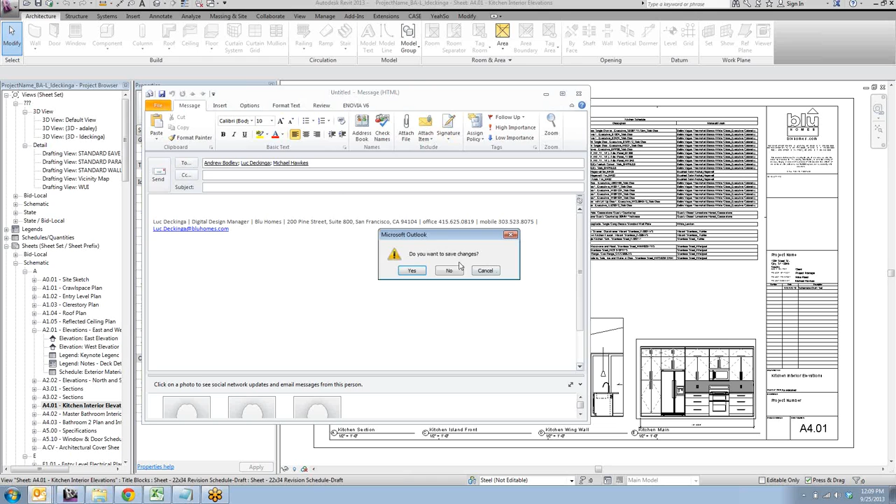else in our inbox. Like, I have my inbox set up so that anything that gets sent to Revit managers specifically will go into its own folder, because I found that if I'm really busy and I get an email, I'll read it and then forget about it or forget to tag it or something. So if you guys could start using that as a way to track issues and make Revit requests, that would be super helpful. All right.

All right. I have some seed model things that I want to go over. That's sort of the thing that we have more to look at than we will have time for. So I'll do that at the end of the meeting, and we'll get as far as we can with that.

The other things that I wanted to mention, we had talked about call-out codes, and we have a system for those which interfaces with the spec library, and I have a sample output from that. And I wanted to get feedback from all of you guys as to whether what we have is going to work for you, whether we need to change it, or exactly what we want to do with it. So I'll show that stuff here in a few minutes.

There's also been a change to the window families, and there have been some updates in the type catalog that I'm sure you've all seen the emails about. The only major thing that has changed with those, and I don't feel like it's necessary to bring up the families and show you, but the buck object, which used to be in there, has been removed because the factory doesn't need it, nobody's using it, and it sort of made our families more complicated.

So that's been removed, as well as some of the hosting relationships have been changed because they used to be based off of that buck. So that stuff you don't really need to worry about. Let me know if something breaks in the windows, though, or if they look like they're hosting weird. So yeah, just know that I've been in there modifying things.

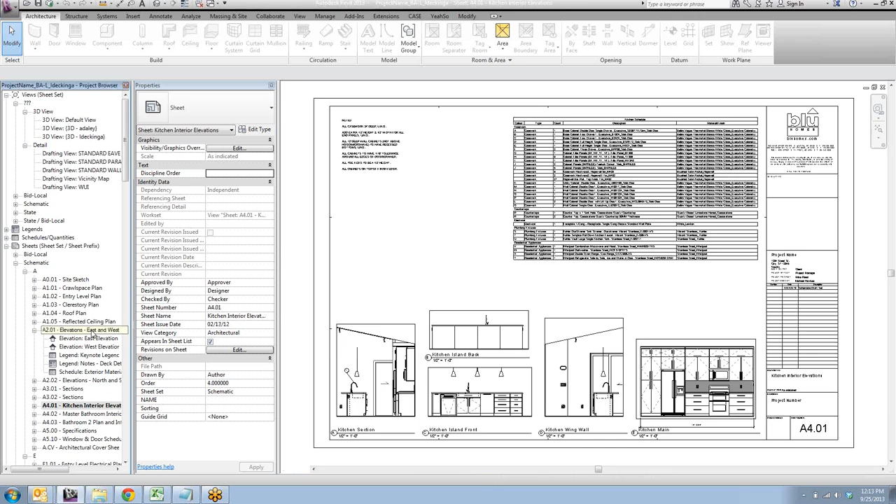Yeah, so I guess just to break it up, we have PSA details that you draw for your projects, and then there's the standard PSA details that we're developing. And those are coming from Nocti. So she has a PSA book that has renderings of the options that she wants. And then we look at all the PSA details that we've done, and then develop details based on the renderings that Nocti is putting together.

So the PSA details that you're developing for your projects aren't necessarily going to become standard details, so I don't want to tell you to stop drawing PSA details. But at this point, you probably should stop bringing all of your details into the in-process library file. Other than that, if you have PSA details that you think are standardized or should become a standard model, just give me a heads up that you have it, send it my way, and then I can either forward it to Nocti or the powers that be so that they can include it into the PSA book.

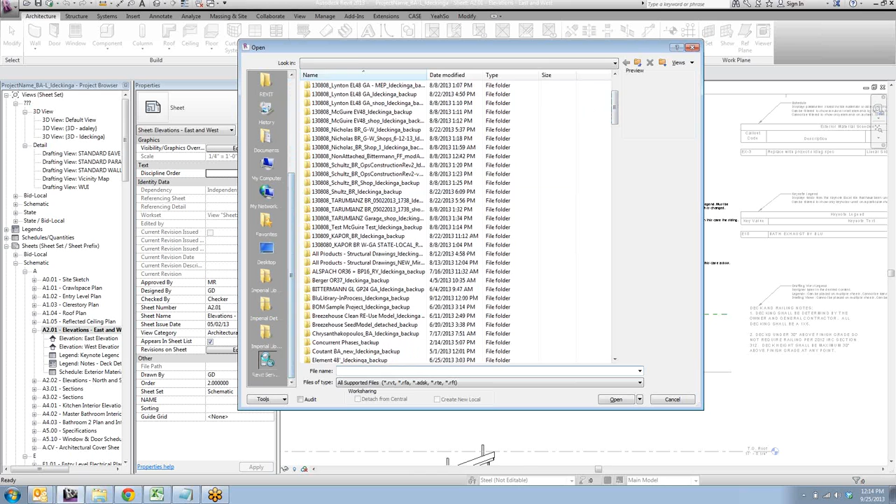Where's that file? Or the file that you're working in, all of the standard ones? That's in process. So BluLibrary. Oh, it's on the S drive. No. No, we put it up here, didn't we? Yeah. Oh, BluLibrary, that's right.

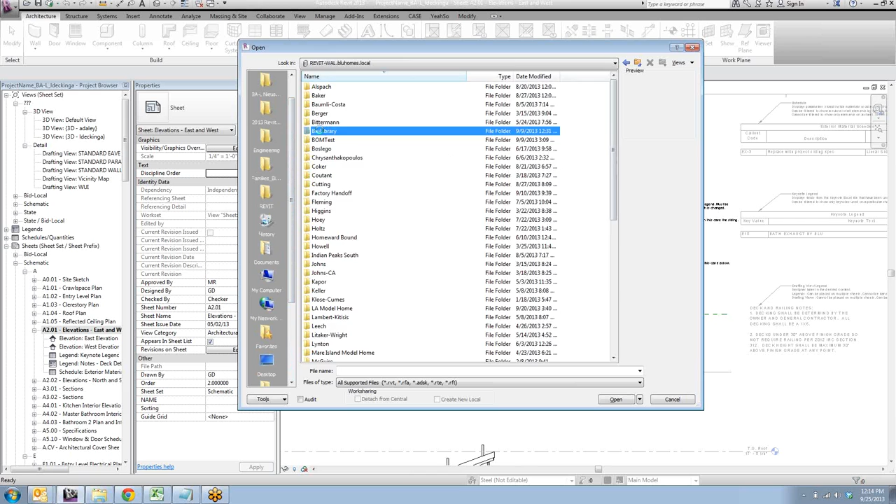Okay. Yeah, so Chris is working in this file trying to standardize PSA details, and I know in the past when people have had free time, we've been trying to compile all of our project details that we've drawn on a project-by-project basis into this file in order to look through what we have and pick out the most standard ones and work from those. And I think what Chris is saying is that we don't need to collect any more project-specific details in this file, that we have enough to work with.

So if you have something that you think should be placed into this file that we haven't used before, just talk to Chris, contact him. He's organizing all of this. And make sure that you're not just throwing a bunch of stuff into this file, because it's getting to the point where it's more complete and more organized, and if we have a bunch of hands in there moving things around, it gets hard to tell what's new, what's been looked at, what's been edited. So Chris is organizing that. If you have time and are working on these sorts of things or drawing PSA details, just check in with him before you start moving things in.

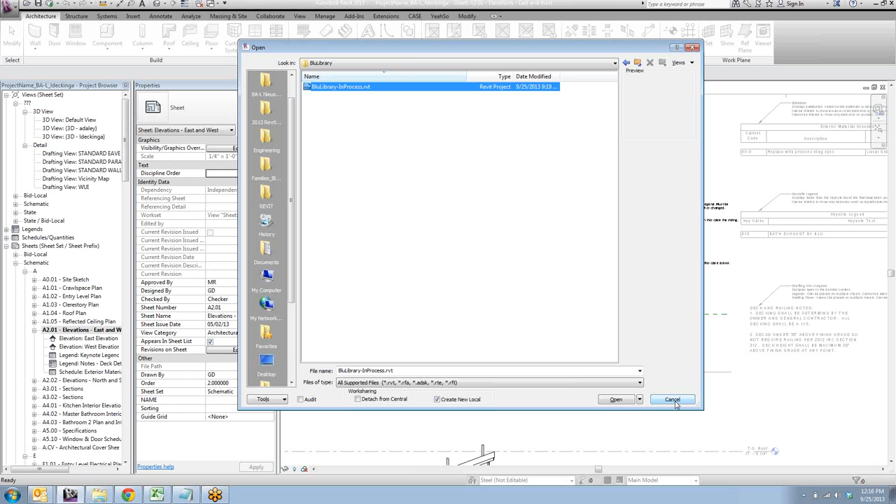Yeah, and if there's a detail that you think is a standard that exists, just let me know, because, for instance, this morning Andrew emailed me about a deck edge detail, which those are already in process. So there's the potential that it could already be in the file and already vetted. So just give me a heads up.

Okay, I think those are all the general announcements. I want to talk about call-out codes with you guys and show you the work that has been done on those. And just as a reminder or a little bit of background, this effort of creating call-out codes for all of our different objects has two purposes. One, so that there's less work for designers to do on a per project basis, because all of these call-out codes would be defined in the family, or in the type rather.

So when you go to tag something in a view, it already has a call-out code associated with it, similar to the way that the doors and windows do, rather than the current process, as I understand it, of going into all of our interior elevations and modifying the instance ID parameter and numbering things 1, 2, 3, 4, 5, 6, 7, all the way through however many you had, as a way to tag them and associate them with a particular interior elevation schedule. So less time on the designer end and more consistency between projects is what prompted all of this.

And after a couple of rounds with a handful of people trying to figure out exactly how we should be naming things and organizing them and grouping them, we came up with a system that we organized with Laura and Josh using the part inventory.

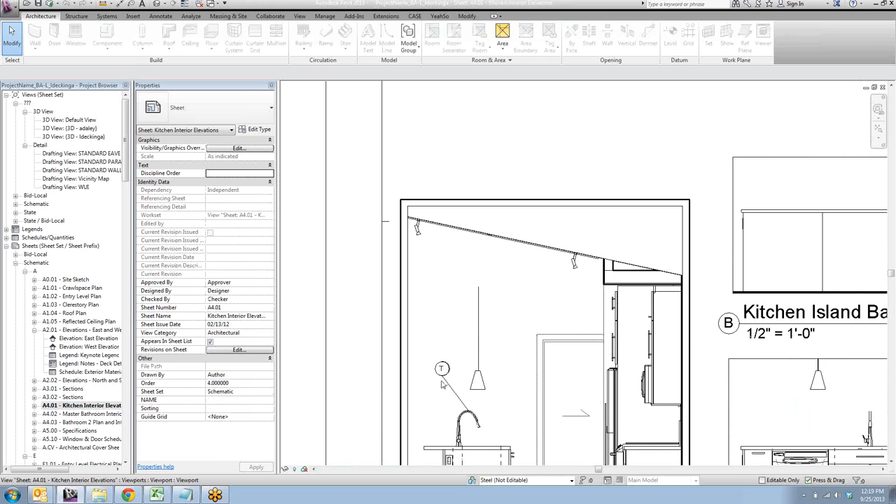So the proposal is that this call-out code would replace the code that we're using on the interior elevation, and I'm in the seed model right now, and these things aren't tagged fully, but you can see, this probably looks familiar to everybody, where you have a tag which is reading the instance ID, and then the instance ID for this particular object, you go in there and you set, and then that lets you reference the object inside of a schedule.

I'm not sure if this is crucial for us. It may help procurement if there's consistency between things. They might start to recognize what a 3472 is, but I doubt designers are really going to see that many projects to be able to associate those things, at least not for a while.

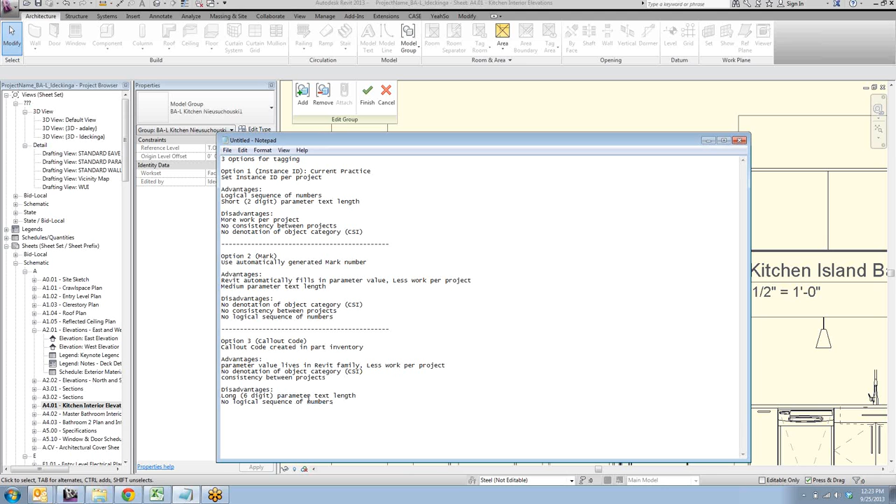yeah, and then the other thing, the last disadvantage is that there's not a logical sequence of numbers. As you can see from the spreadsheet, 9504 doesn't mean anything by itself, and you're not going to have a sequence of things in your drawing. You'll have just whichever of these you happen to have in there.

So given those as our options for how to tag things inside of our projects, do you feel that the disadvantages of not having that logical sequence and having a longer callout code are so disadvantageous that they outweigh the advantages of having the consistency and not having to do the work per project?

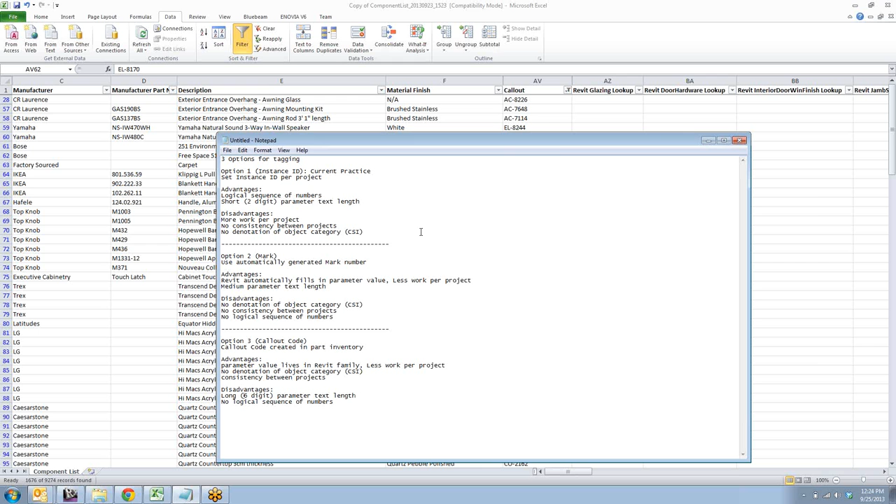Is it just going to be the text, or are we going to have an oval or a circle around it, or is it just going to be floating out there? Sorry, say that again? With the tag, is there going to be like a square around it instead of the circle, since it's long? I mean, we can make it however we want. The circle definitely doesn't make sense because it's going to be longer than it is tall, but the graphic of that, we can make it look however we want. What about a rectangle? Rounded rectangle. Octagon. Parallelogram.

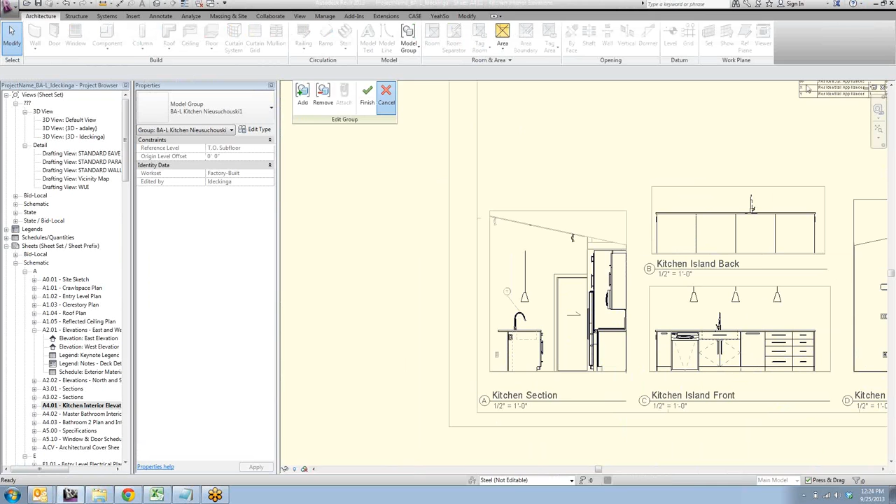Octagon. I think the general consensus here in Ann Arbor is that the call-out codes are a good idea. Yeah, that was option 3. All project. Kevin's for it. I mean, the logical... You guys are okay with having a schedule that says CO 1972, FR 1267, like that? That's not too bothersome, or if it's a little bothersome, it doesn't matter all that much. It rocks. That's what the code is.

Yep. Love it. It's still going to show up in the schedule as like a module. Yeah. It's just going to have another column that says mark or whatever, or call out. Yeah. I don't need to really pay attention to it, which I guess is a good thing. Yeah. Okay. You just tag it and model schedule. Good. Okay, yeah, I agree with you. I would rather do the work once and not have to do it on a per project basis.

I just wanted to make sure, and I'm glad you're on the line, Kevin, because you're the person who reviews these and gives the okay on how the drawings finally look. I think it's worthwhile to do it this way. I just wanted to get the final check from you guys before it's all implemented and we update all the families with this information.

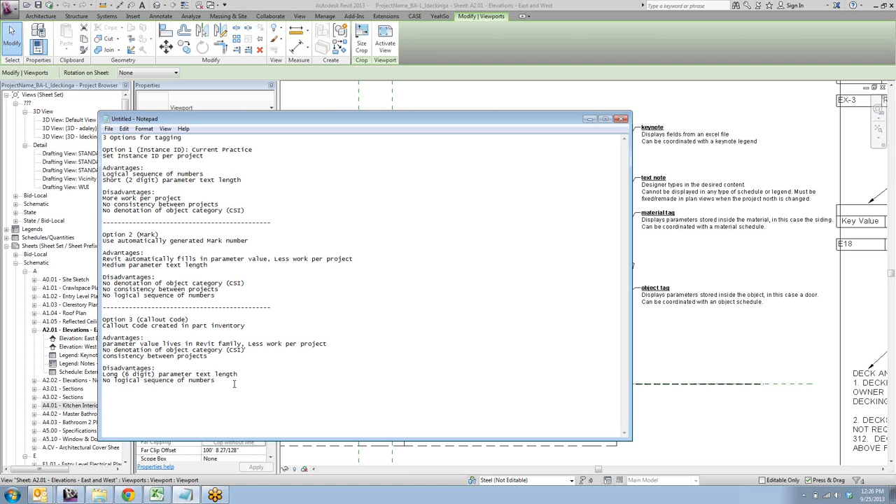Hey Luke, isn't it possible to put things in order anyway with sort of a hidden field using the mark or instance ID? I mean, you can still put things in a certain order on a schedule. Yeah, certainly. And actually, because we already have the instance ID parameter in there, we could still use that as an ordering mechanism and just not use that in the callouts. Alternately, we could add an order parameter similar to the way that the sheet sets are ordered. It's basically that same sort of idea.

But since we have instance ID and we've been using it and it's already in all of our schedules, I sort of want to just say keep using that as an ordering mechanism, but just don't use it as a call-out mechanism. Yeah. Doesn't that kind of undermine the whole point? Well, it's just like in the schedule and the drawing, it might help to have it in a logical order. But then...

Well, you're already going to have it grouped by CSI, right, inherently, and then since the first two numbers are manufacturer-based, it's going to group those. So your Toto toilet is going to be near the Toto push button and stuff. So I think it might. I'm not sure if those first two are manufacturer-based. I think the first two aren't manufacturer, so you may have to use a separate parameter to get everything grouped together. The first two... What's that? The first letters are. Oh, it's just kind of by coincidence that some of those are.

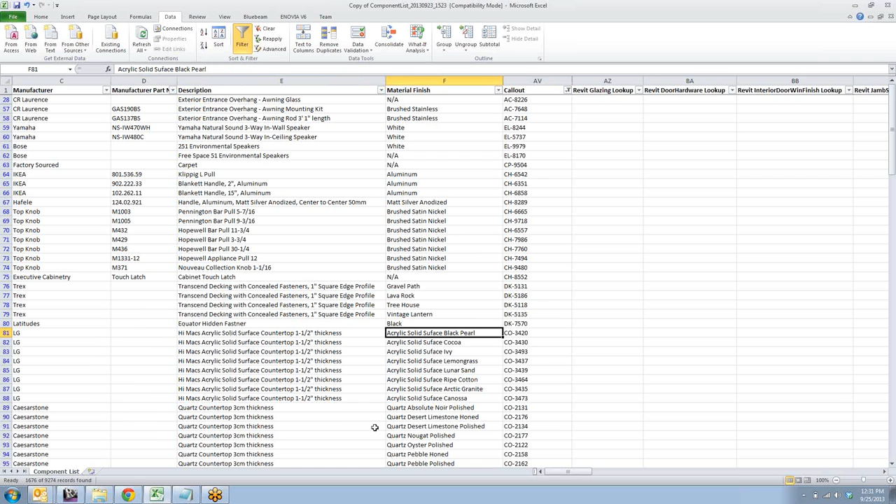Can you show me what a drawing looks like then? With this? Sure. So here's my—I didn't input these codes into this drawing, but this was my shortcut of how all of the different schedules work inside of Revit. I think the most relevant one here is this material tag.

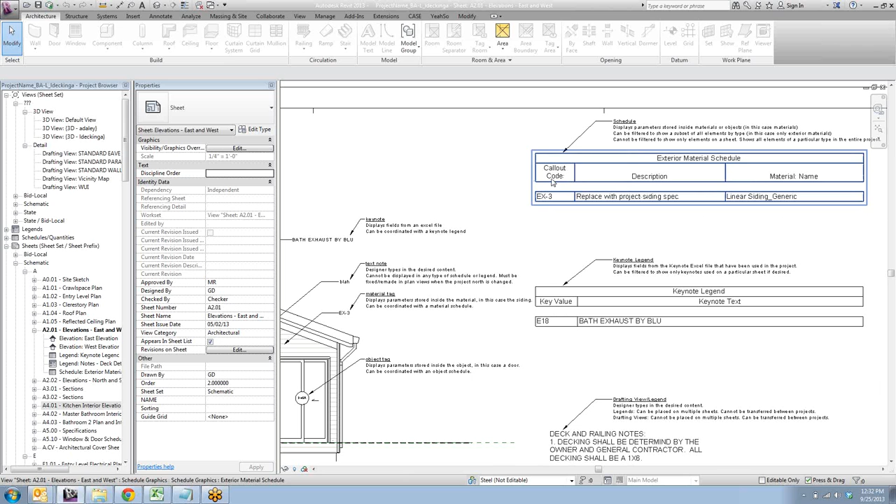So it says EX3. Here's an exterior material schedule which says EX3. This is generic because it's in the seed model, but this would say cedar siding, whatever the reveal is, and then clear cedar over here. But instead of EX3, it would say—

CA-4893 or something. Not exactly that. I didn't memorize them yet. I would be impressed.

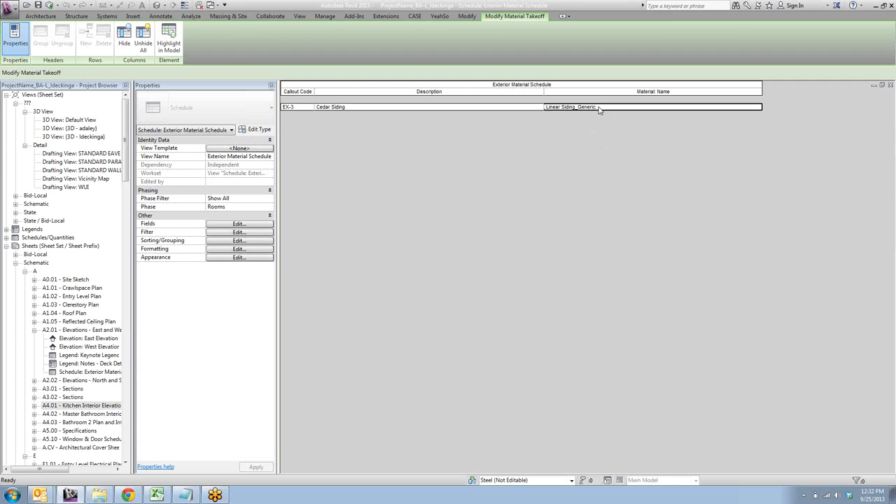And would these numbers themselves be on the order so that we can look number to number? Sorry, say that again, Kevin? The order that is rolling out, that's replacing the STRF. Is it possible that these numbers are also on the order so that we can compare number to number as we're checking our stuff?

That's a really good point. I don't know how the sales order is being generated. If they are using information from our part database as a way of filling out the order, then it will correlate, because all of these numbers are stored in the parts database. But if they aren't, then we can't. It'd be really cool if they did. It would be really cool.

So you need to get together with Kay. Okay. I will do so. She's done a number of various situations—she's told people in design what they need to do. So I would say, here's something that we're doing, and the order should probably follow suit. Like, not to be mean, but I don't think it's really a question.

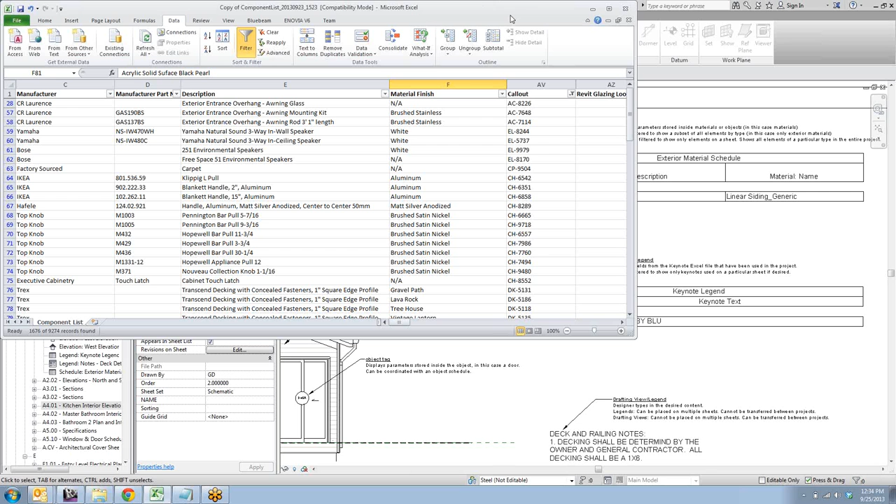So potentially we have a spec database that's tied to all of these, and all of that's consistent. So at least within design, we're talking to one another. Yeah, exactly. And actually, you can already see all of these codes - they're already integrated into the part database.

I think Jeremy made a new release of BomGen and it was pulling from the database, but he didn't want to say these call-out codes are in here until I had a chance to show you this stuff. So if you run the generate component list function in Revit right now, the list it spits out, all of these call-out codes are already in there.

And that's actually what this spreadsheet is. It's just an export of the component list from yesterday.

So what we'll have to do is take these codes and update our families so that they have all of this call-out information in them.

But once that update has been made and you load those families into your projects - I will load them in your projects - you should be able to use them. I will create tags that will read this specific parameter in all of those families.

I think it's still going to be the call-out code parameter, but we might have to make a bigger box to accommodate for the 6 digits. I will do that and send it out to you guys and let you know when everything's been incorporated back into the library. So for those of you that have flex time and want to do copy and paste into families, let me know.

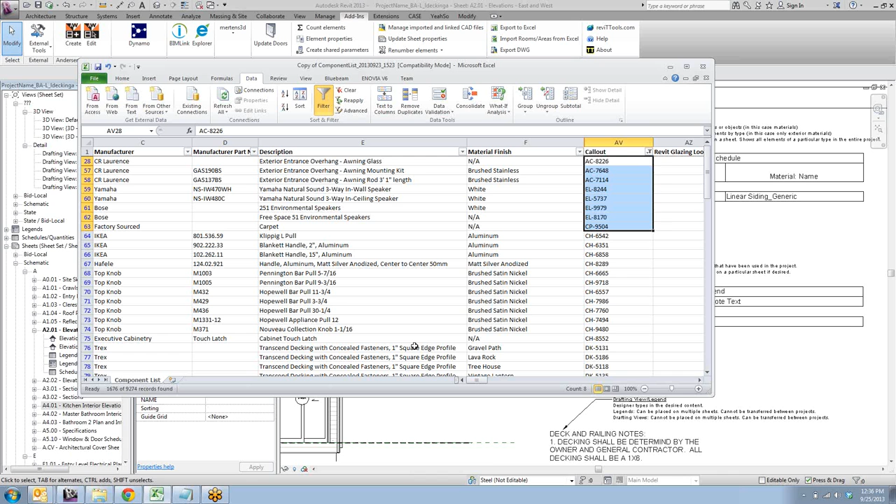I know you're excited.

Okay, that's it on call-out codes. Thanks for your feedback, I'm glad we're all on the same page, and I will follow up with

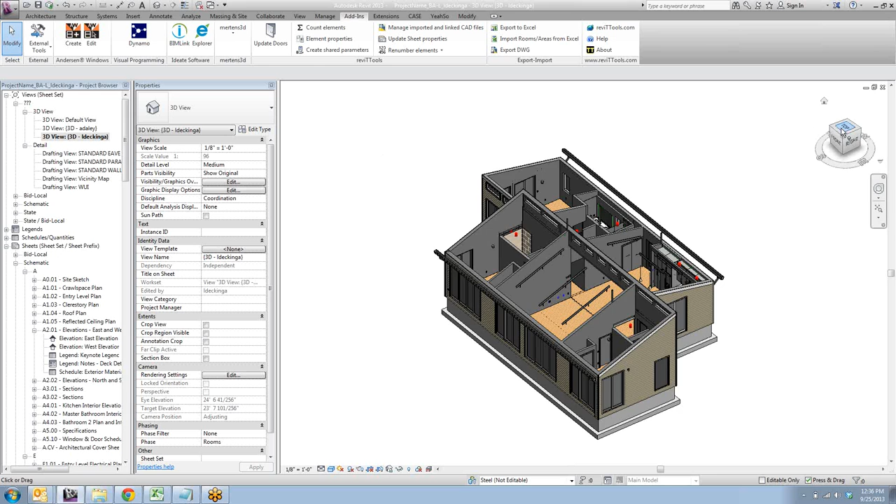Kay about the sales order and incorporating it into that. Get me involved, I know that's going to be a problem. Okay, you can be the hammer.

All right, in the rest of the time that we have, unless anybody has immediate issues that need to be addressed, I wanted to talk about some seed model process.

So in the last week, we've had a couple more people start seed models. I know Kevin started a Lofthouse seed model based off of Higgins, and Youngju started a Breeze model, and like I said before, I don't remember which model she based it off of right now.

But as we start building these, and as more people start building these, there's a couple of tricks coming out to make them easier. Kevin and I worked through a couple of things yesterday, which for anybody making seed models, and maybe even people working on current projects, are going to make things a lot easier in terms of moving things around and rotating them, and rotating project north and all of those sorts of things.

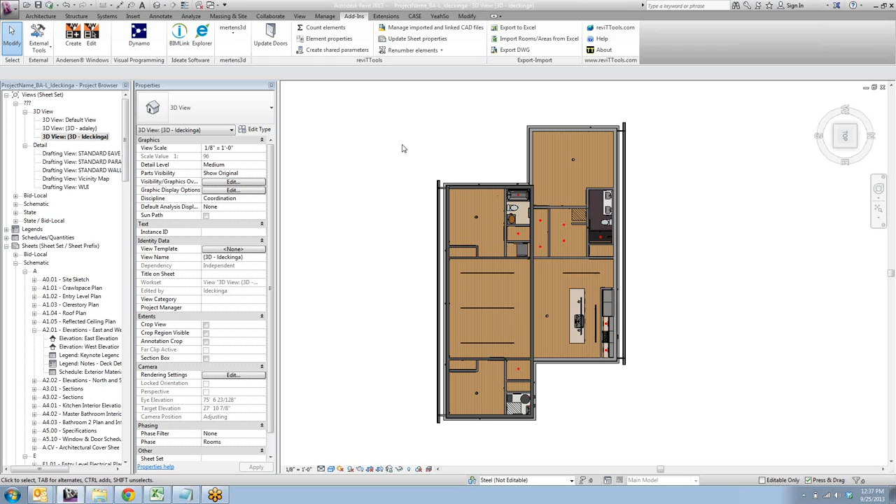The big one that Kevin and I talked about yesterday is if you start off with a project model, it's placed at a particular location in space, and getting the model back to the 0,0,0 origin point of the project can be really difficult without this really simple trick.

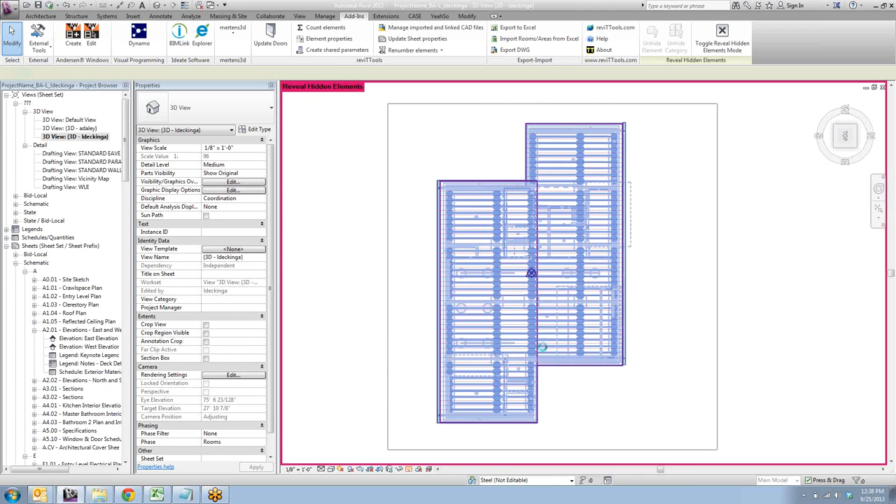So previously, doing a huge select of a whole bunch of stuff and saying move and moving it somewhere, or trying to rotate it, it'll give you a bunch of errors and hosting relationships get broken. So don't do that. The way that Kevin and I figured out, which is so elegant and simple, it's going to knock you off your feet.

So these two symbols, which are one right on top of the other, which some of you might be familiar with - there's the project base point and the survey point. And these sort of define your project location in 3D space. They can be moved independently of one another. What we want to deal with is the project base point.

Right now I have it hidden, which is why I'm in the little pink screen. But you can see when you select the project base point, you get this little paper clip. And when it has the line through it, it means you can move it without moving anything in the model - it's sort of independent. And if you click the paper clip, the line goes away, meaning the base point is clipped to the model. That's their cute little symbol for it.

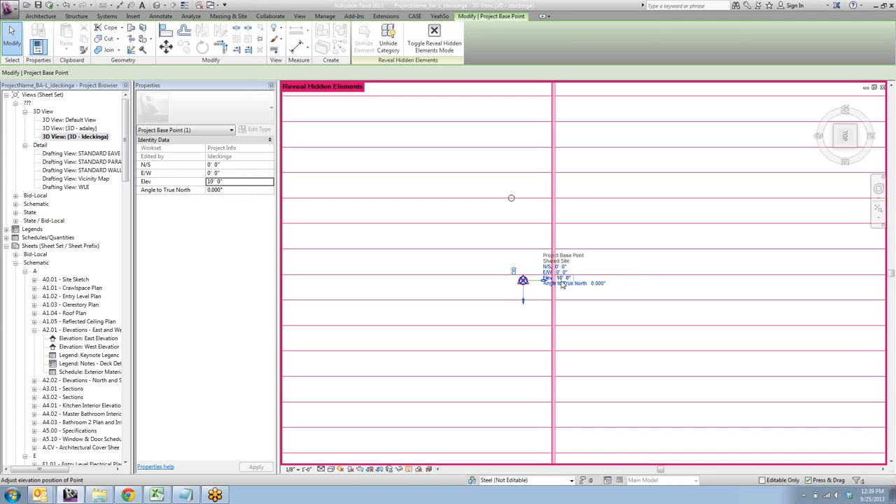You can also see that it gives you a readout of where you are in the north-south, where you are east-west, and where you are in terms of the elevation of your project. You can see right now I have it in the very middle in both directions of the model, and it's at an elevation of 10 feet, and it's at 0.

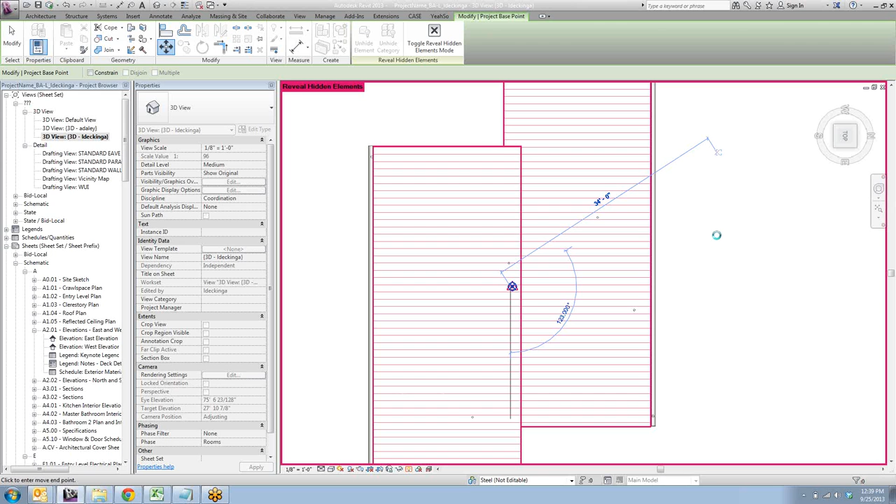If you were in a project model and you're trying to make a seed model from it, that project base point is going to be somewhere else most likely. You can see I moved it, and because I didn't have it clipped, it moved fine and nothing came with it.

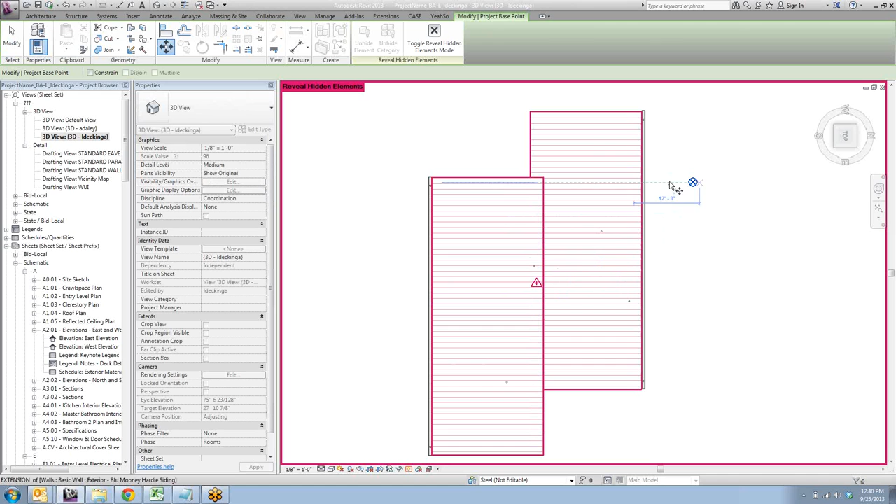So to get your model to the 0,0,0 position using the project base point, select the base point, turn off the clip, move it to wherever that center is. You may have to draw lines. Yeah, you can do it in a plan view. You don't have to do it in a 3D view where you can't draw detail lines.

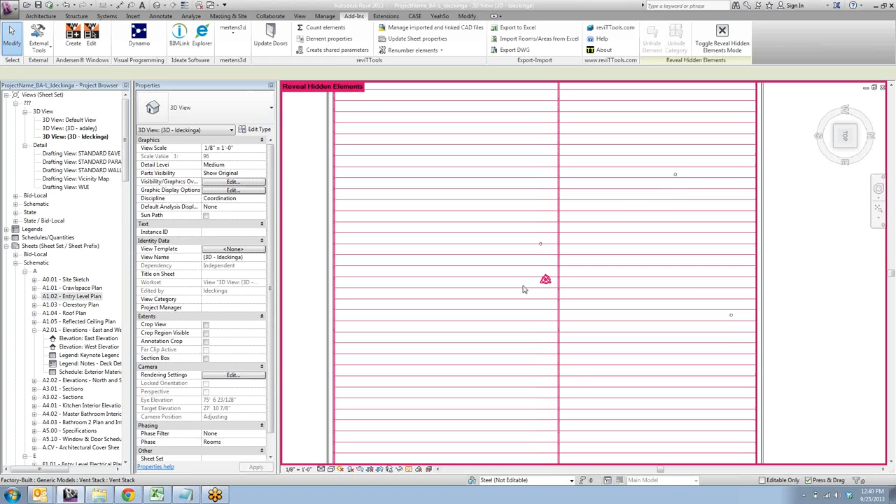So you could go into your entry-level plan, draw some construction lines so that you get that point where you want it to sit, and then move the project base point to there. You can also type—if you have the project base point selected, you can type into these fields and it'll move it for you, which is really nice. But then after you get that in the place that you want it in your model, you turn on the clip, and then you can say 0,0,0.

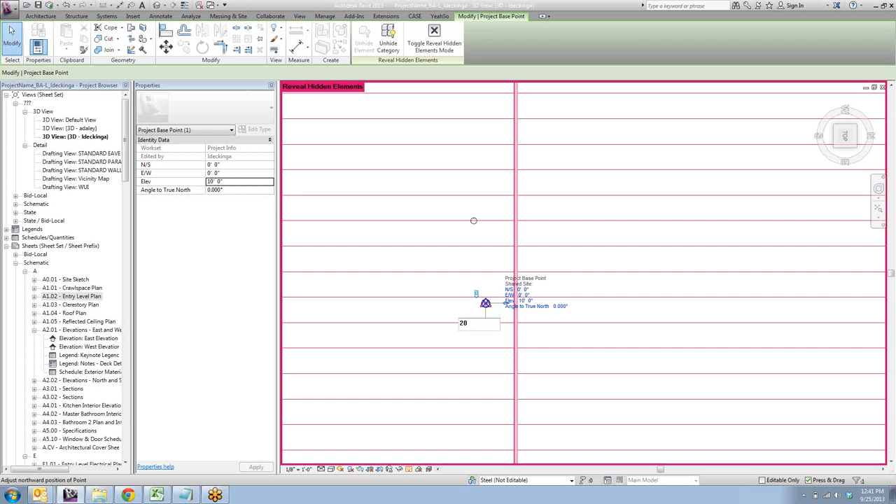Because I'm already there, I'm going to show you something. Let's say I wanted to move it to 20. You see I just changed that. It moved my entire project over except for my survey point, which stays in the same spot.

It also works in elevation. So if you're at 3,000 feet and you want to go to 0,0,0 as your elevation, which I think we decided is where we want to use as a starting point, you can do that as well.

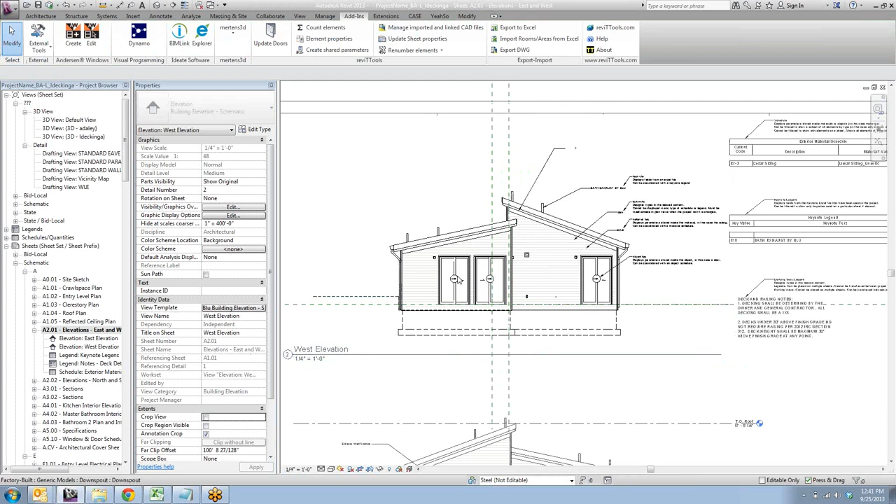Sometimes selecting it can be hard because as you zoom in, it doesn't make the object any bigger since it's not a physical object. So a lot of times what I'll do—and I think I've shown this to you before—is just do a big crossing select and use your filter, then turn off everything except your project base point. Now you're only dealing with your project base point.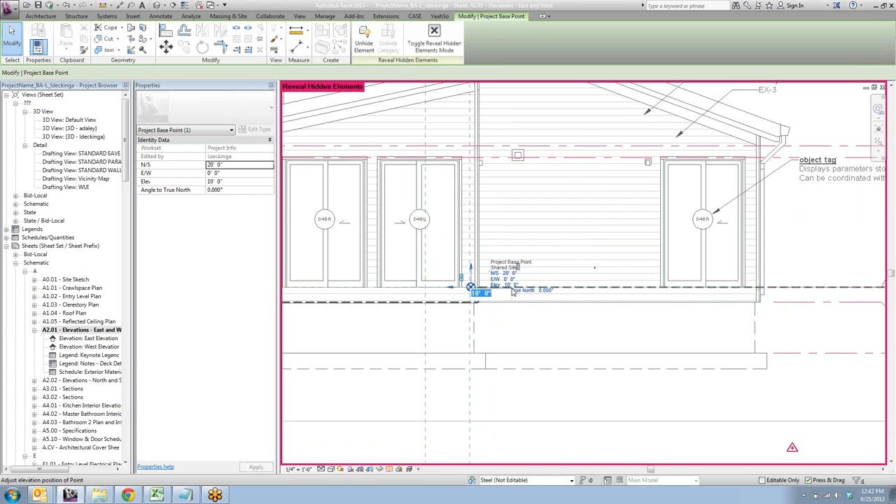So again, the clip works the same way in elevation. Make sure it's clipped, and then we want our project to be at 0. You move your project down.

Again, this is a common theme with Revit, and it's a little hard to get your head around, but pretend as if the house doesn't move at all and the world moves around the house. If you try moving a bunch of elements at once, just because of the way that Revit constrains things together and has hosting relationships, it doesn't work. So I would highly, highly recommend using this as a method.

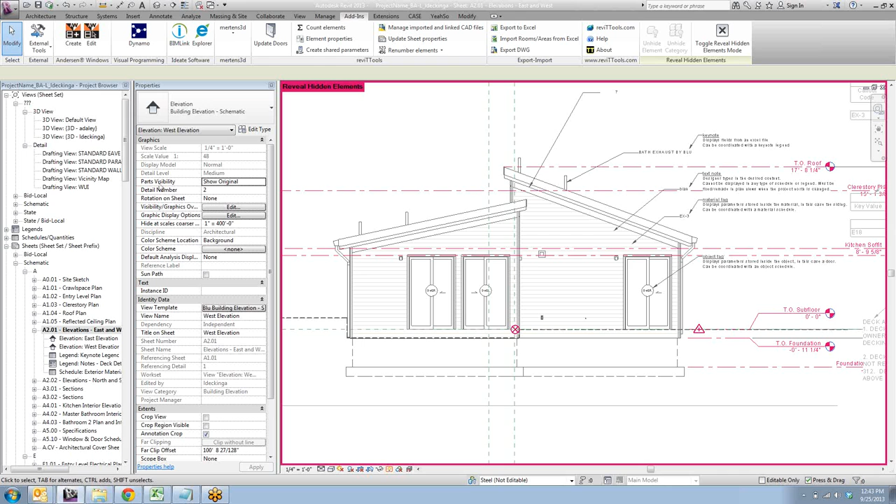The other nice thing about having your project at 0,0,0 is that if you rotate your project north or you mirror your project, both of those commands always do the flipping about the 0,0,0 point or the rotating about the 0,0,0 point. So instead of rotating from out here and throwing your house way off into the middle of nowhere, it'll all rotate really nicely, and your house will stay inside of all of your views, and everything will be super happy.

So, thanks for working that out, Kevin. That's been a headache for a while. I can't believe it was that easy. I know, I know.

Any questions about that?

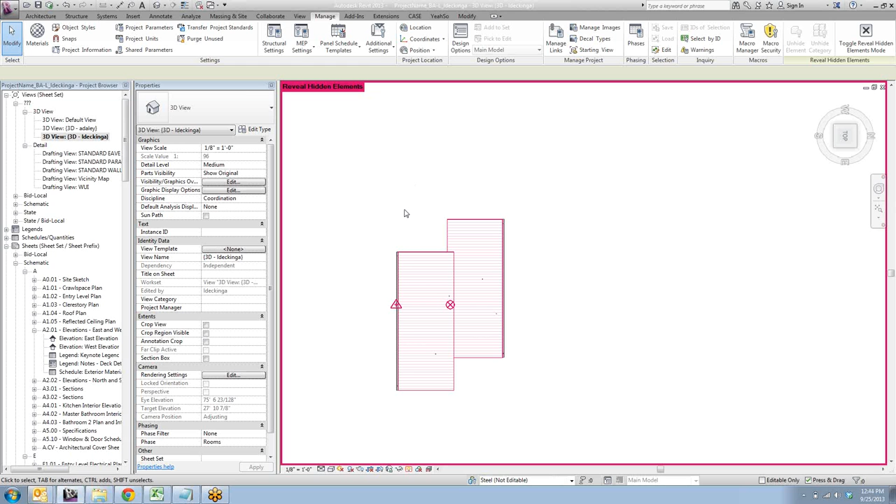Luke, how would that work if you changed the angle to true north? Would that rotate the whole project? You know, I tried that, and it didn't, which sort of surprised me. It's pinned, or it's clipped right now, so I expected that to change your orientation to true north. It did—it changed the compass in the top right.

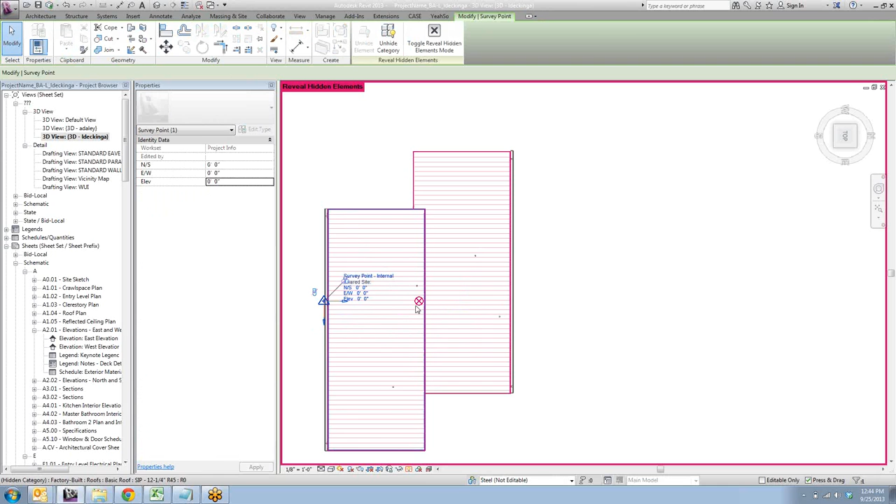Yeah, you're changing the... oh, it's changing the true north, it's not changing the project north. Right. Wait, if you do it to the other one—yeah, you can't do it to the other one. Can you rotate? Yeah, and it doesn't give you the rotate tool for either one. So I think you can change your true north using the project base point rotate, but you can't change your project north using it. Okay.

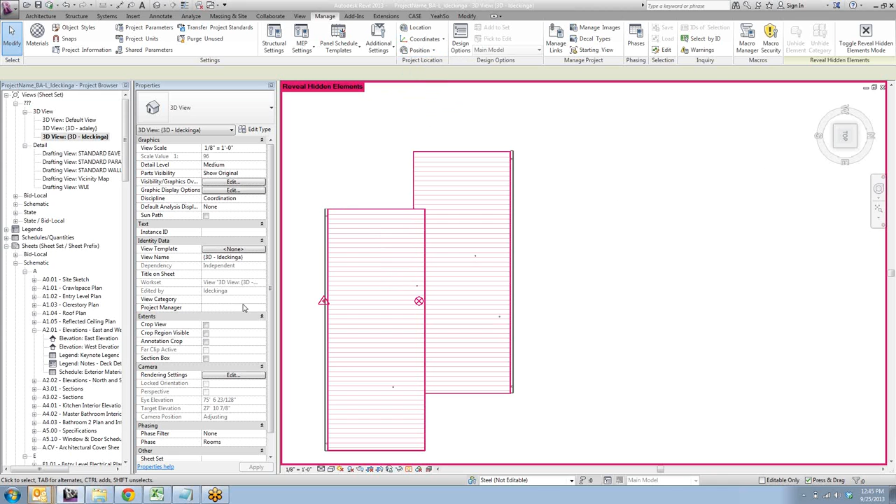Cool. But you can just rotate your project through the, like, through there? Yeah. I think I have to be in a view in order to do that. Yeah, so now it'll let me rotate project north. Cool. Just wondering. Yeah, no, that's a good question. I tried the same thing. Yeah, it still doesn't give me a rotate in here. Is this one going to give me a rotate?

When would you want to rotate your project? You want to rotate your project north so that a drawing lays out nicely on the page. You don't want this to be 30 degrees off of axis in all of your drawings. So that's what the project north tool is used for. It should be built square to the page. Yes.

Yeah, and you probably know this, but you can set your orientation for a particular view to either project north or to true north. So in all of your site plans, you want to set it to true north, and in all of your floor plans, you set it to project north. So you can have the two different orientations of drawings. And I think because I'm working in the seed model, both the project north and the true north are set to the same place right now, but they can move independently of one another.

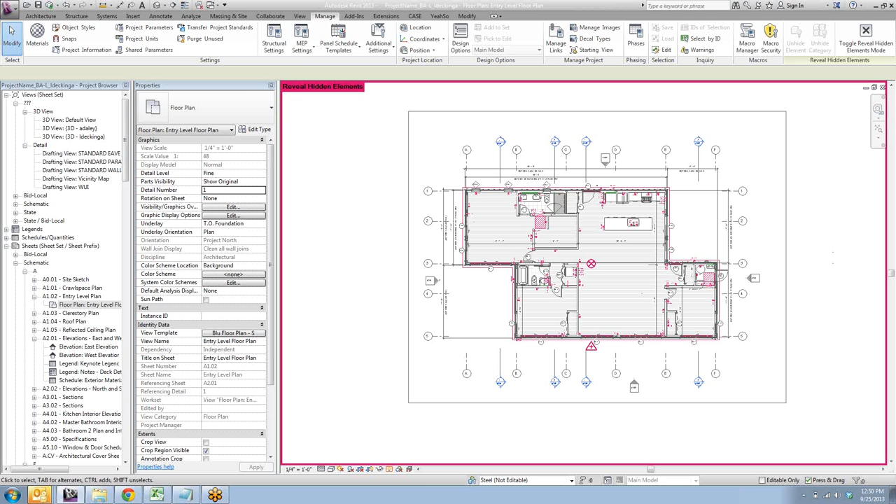Yeah. You can set it up in phasing. What's that? It's just whatever the Revit default is right now. If you go to phasing, you can set up like show demo as halftone, show it as dashed, stuff like that. But we don't have demos, so it's just weird. I think the phases, I know I've seen that before. Yeah. So here's the graphic override.

Yeah, so it looks like existing lines. Yeah, so here, we haven't messed around with this stuff at all. I don't think we really use it. If it would be helpful for something that you guys do as drawings, then we can be more specific about this. But if we do, yeah, show complete. Existing is by category, new is by category. So these are the only two that we really use. We don't really use demolished or temporary objects all that much.

But if you do, as long as you're using show complete... it looks like if you're doing show all, Ryan, it is overriding existing. So that's probably what's happening: you have it set to show all, and then anything which was created on a previous phase is showing up as overridden with that gray. So change it from show all to show complete, and you should be good.

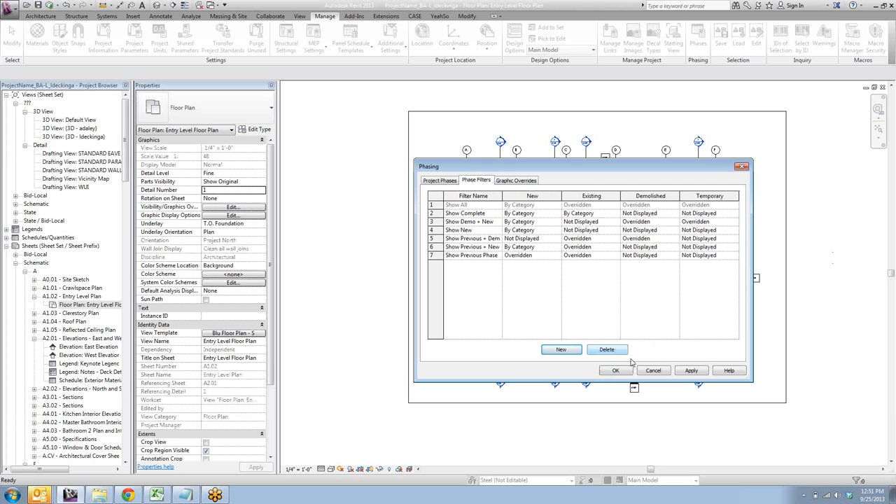Okay, sounds good. Hey Luke. Yeah. Could you check the interior hinged one-panel doors, the new ones? Because when I load them in, the trim seems to try to escape from the doorway. And it doesn't look like that in the actual family, so I don't know what's up.

If Carl L. is on the call, he might be able to address that more directly, but I know we were trying to build in trim so that on the interior doors we could have trim on both sides of the wall, but because of the way that doors host in walls, you can only say align for one of them. And then the other one should be determined by an offset parameter. Although, well, I'm not sure if that's actually true.

This is Carl Lorenz. The trim should stick to the wall nicely on the hinge side, no matter what, and the other side is determined by the standard jamb depth for that interior door, unless it's being hosted in a wall that's thicker. Well, it's staying on the wall. It's just that it's moving up, like 4 or 5 inches off the edge of the door. So there's a big space in there that shouldn't be there.